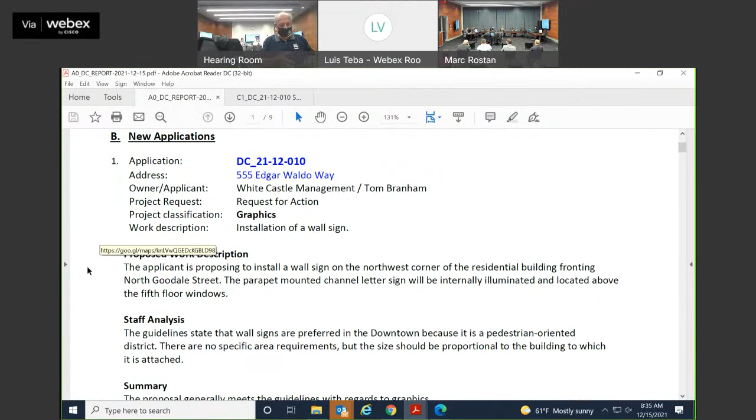Sure. So the first case is 555 Edgar Waldo Way. It is here at the White Castle Reach Development. The applicant is proposing to install a wall sign on the northwest corner of the residential building fronting on North Goodale Street. The parapet mounted channel letter sign will be internally illuminated and located above the fifth floor windows. The guidelines for graphics are that wall signs are preferred downtown because of its pedestrian oriented district. There are no specific area requirements, but the size should be proportional to the building to which it is attached. So the proposal generally meets the guidelines with regard to the graphics.

That's it. Okay, very good. Can we get the... you take over from here. Would you identify yourself, please?

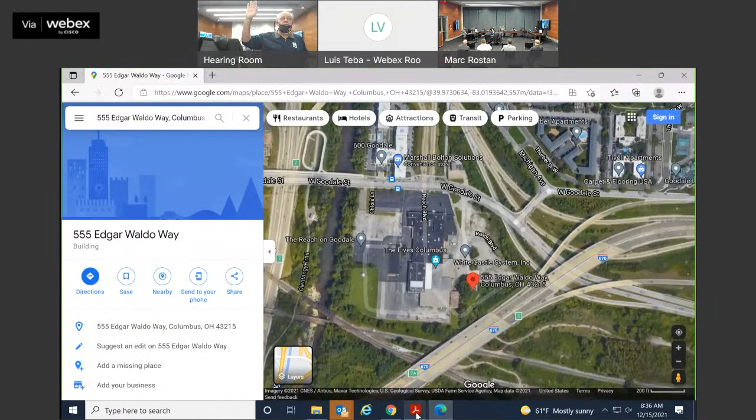Yes, I'm Bob McCollum, and I'm here representing Branham Sign Co. Could you raise your right hand, please? Do you swear and affirm the testimony you're about to give is the truth, the whole truth, and nothing but the truth? I do. Thank you very much.

Go ahead, Bob. Yeah, we're just here asking for approval of the individually mounted channel letters on the reach. It's a typical channel letter, so we've already done this type up there. They will have a white face, and the drawing on page 2 indicates the side of the building that the letters will be mounted to.

Are these the same size as the stuff you've done before? Yeah, I believe that these are 24-inch letters. Okay. And you can see a picture of how it looks on the building. Is it just the one, or were there two? There's just one set of letters.

Any thoughts on this, please? Could I have a motion to approve then, please? I'll move to approve. Okay, a second. Motion and a second. Thanks very much. Any other questions, comments? Anything from the audience? All those in favor say aye. Those opposed? Thank you very much.

Thank you so much. I made it just for fun. Every once in a while it gets easy.

Great. Next case then, please. We go to the next one. All right.

But one thing, we didn't do a motion to approve the minutes last week. I beg your pardon, I thought there was something. It seemed like there was something. Could I have a motion to approve the minutes?

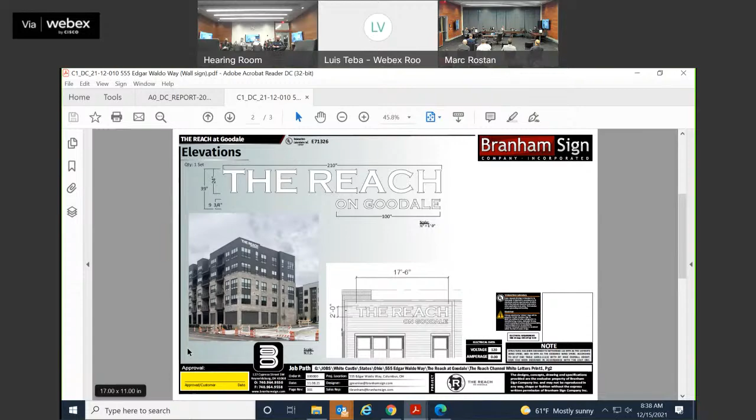Next case is 190 South High Street. Here's an aerial view of the location.

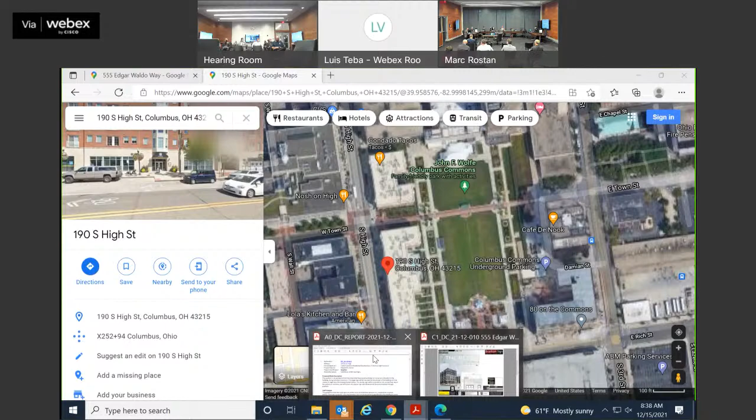This is right here to the west of Columbus Commons, this building right here. They're going to be putting 2 wall signs on the interior facing the park space there. So they're proposing 2 internally illuminated wall signs on the eastern elevation of the building facing Columbus Commons. The larger sign will be mounted to the parapet of the building and will consist of single-face illuminated channel letters. The smaller sign will be mounted on the second floor above the pedestrian archway and will consist of a plaque sign with dimensional illuminated push-through graphics.

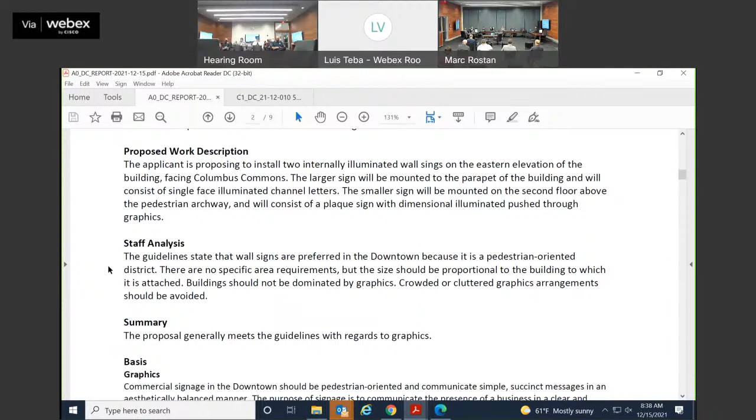Guidelines for graphics are the same, except crowded or cluttered graphic arrangement should be avoided. The proposal generally meets the guidelines with regards to graphics based off the analysis of the graphics section. Is someone here for the applicant, please?

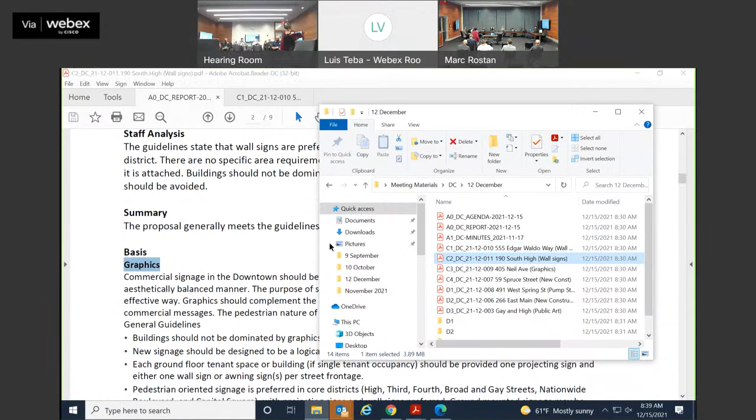Good morning. Good morning. My name is Rebecca Green. I'm with Zoning Resources, and today I'm working with Columbus Sign Company.

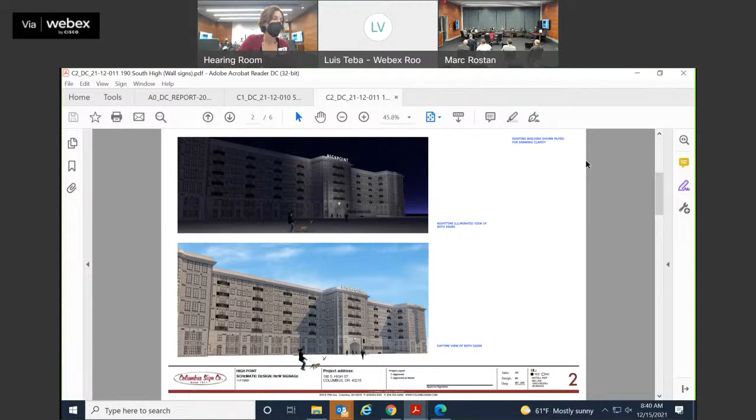The reason we put them here on the parapet is that the cornice underneath is not something we can use to stand on or have our workers on to place those below the cornice. Also there are windows underneath the cornice that would not provide an area to put this kind of signage. We want to keep the workers safe and have it above the cornice, and that is why we decided to use these kind of letters in this location.

The plaque that we are talking about is just a plaque that's over the pedestrian walkway from the Commons to High Street, and again, it's a small plaque with the illumination in the back. Happy to take any questions.

Okay, yes, I have a question. Yeah, please go ahead. Yes. Yeah, I may not have heard you well. Oh, I apologize. Mask, by the way, you're welcome to take your mask off. I think you're well separated and it just makes it easier to hear people. Oh, very good, thank you.

What is the owner's purpose of putting this sign in for the building? The purpose is to gain some additional presence from the Commons. Other businesses have done the same thing. I know Root Insurance also has signage towards the Commons, as well — that's the purpose.

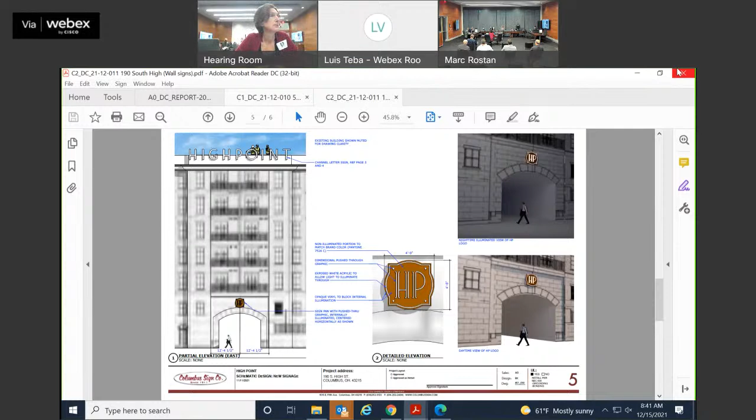What's the height on these letters, please? I believe 4 feet. 4 feet 6 inches and a half.

The spacing is to reflect the customer's logo, the High Point logo is spaced in this manner. This part of the building is massed forward, so they're spaced to match that massing that's forward on the building. And then again, the size and proportion is based on the...

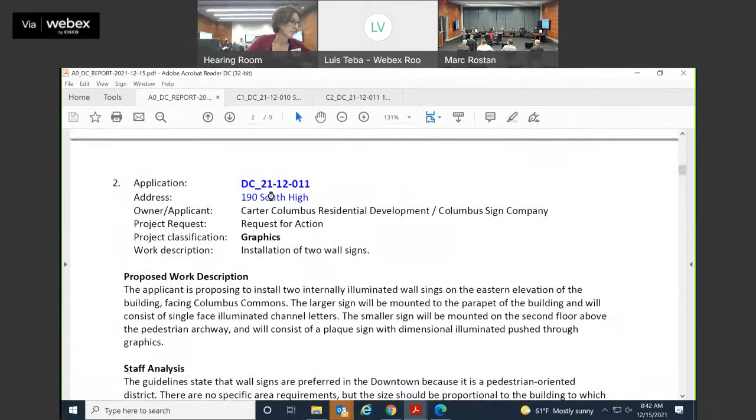What are some of the other heights of signs in that area? Do we have any sense of that? They're not massive letters, but maybe a little bit on the high side at 4 feet. I don't know, maybe that's not... Yeah, at that height, it seems like you need something that reads a little larger.

I wanted to ask you, from the back, you have the exposed metal channel in the back. Do you feel that from across the street, any buildings could see the back of that, or not? You could see the back of your sign? I would think it would be just a de minimis kind of view, not substantial.

Can you show us the picture, flip back to that, either Rebecca or Luis? No. Yeah, there we go. So about half of the letters will be up above the parapet. That's approximately two feet, as much. Of course, they're also going to be looking at air conditioning condensers and other rooftop items.

Okay, what's the pleasure of the group? Any thoughts, comments?

I like the way it interacts with the parapet. I guess one question, did you consider that, for instance, the H aligns with that very edge of the building? I wonder if it would feel better if it was centered and offset by a couple of feet in each direction.

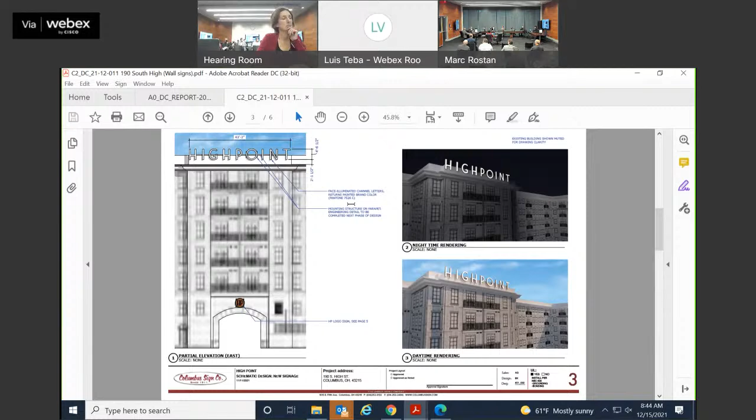I guess I feel a little tension with that H right on the edge of the building, because the T doesn't seem to do that. I don't know if that's intentional or just a mistake in the rendering, or is the intention to center it?

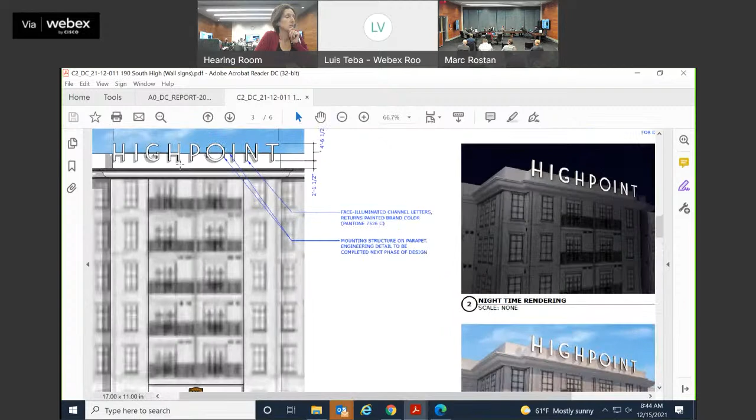The intention was to center it, and I think the reason the T looks a little in is just the nature of the letter. I agree that even though technically that's correct, maybe splitting that dimension, bringing the H in a little and letting the T hang over a bit, might look more centered.

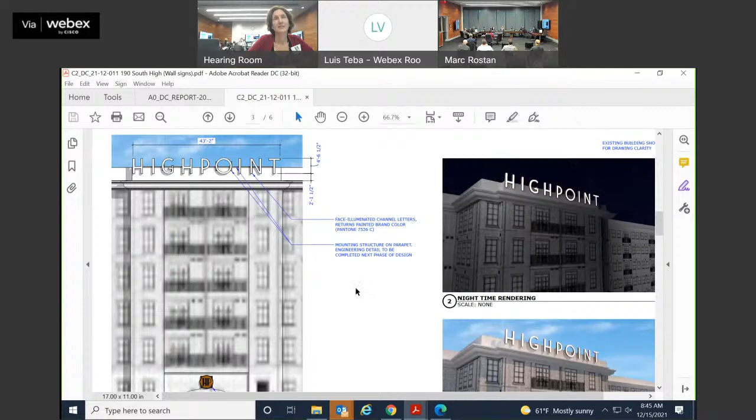Is that supposed to be two words, High Point, or one word? High Point is one word. I'm just looking between the H and the P there - it looks almost... when you play with letters and space them exactly, sometimes they don't read correctly.

Our eyes do things to it, yeah, like that's right, the spacing. For example, the O looks like it needs more space than the I does, which of course it does.

I don't know the exact picture for that, I'm sure the fabricator... but I understand your concern, that you would want that to be better handled.

One thing we do get with elevations is, if you're going to be looking at it, you're probably going to be standing on the ground, which can make a difference, and of course the cornice is going to be a factor too.

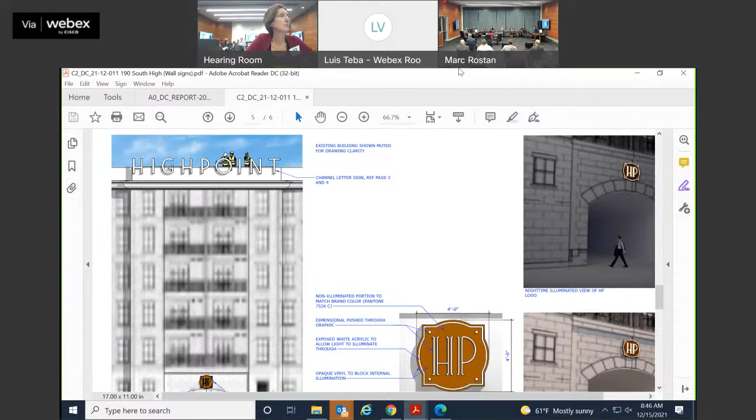I think the commissioner asked about the buildings from the other side of High Street, looking at the back of it - so you have the Lazarus building and all the stuff on the west side of High Street.

I'm just saying, maybe sometime the back could be finished, if you felt that was an issue, so that it doesn't look unfinished from other buildings on the other side. But I really don't know if that would be such a minimal issue or something to consider.

What would finishing mean? Painting it, for example? What is it going to be, what is the material on it? It looks like it's just... painting it dark or maybe putting something else.

Can we see the picture of the back again, can you flip over to that? I think it's mostly some bracketing, but again, it's just aluminum bracketing.

What's the color of the back of the letters then? It's just black. I wonder, here it shows like it just looks like galvanized frame kind of stuff - like you could use metal studs or something.

I wonder if it could just be painted to match the back of the letters. Does that accomplish maybe what's needed? That would kind of clean it up, maybe. So painting the bracketing - is that what you're concerned about? Yeah, the bracketing would then match the back of the letters.

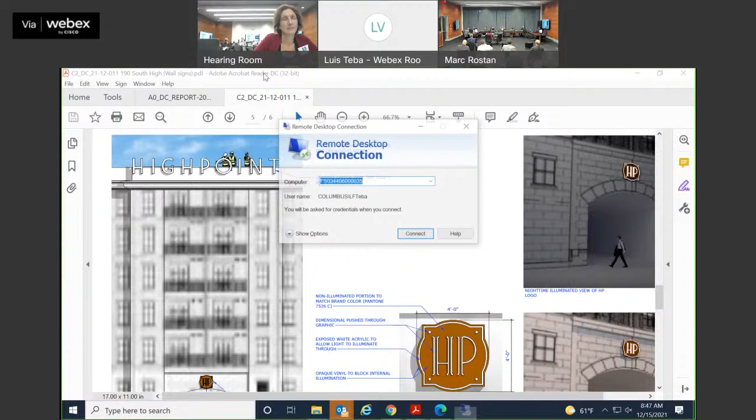Here's what I think we're getting at: if you have a curved line like in the drawing, there's a piece of the bracket sticking up above it. If you're standing off to the side and can see something behind it, that's not what we're talking about, right? No, we're talking about where it literally sticks out, so if you were standing straight on in front of it, you'd see it sticking out behind the letter itself. Does that make sense? It does. I think we're probably willing to approve it on that basis. If that doesn't work, you can come back and we'll talk about it. I'm guessing they'll say that's fine, it's not very difficult.

Thank you. Okay, good. Any other questions, anything from the audience? And that works for you today then? Yes, it does, thank you. Any other questions or comments from the commission? Oh, okay, go ahead please.

Question: the small sign over the arch, is that all internally illuminated, or just the text within it, the initials? Just the text within it, and I believe it's got some spill also, because it does stick out, so it's got some of that. It's a dimensional plaque, so there is some. Does that mean what appears to be lit would be lit? Is that the idea? That's correct.

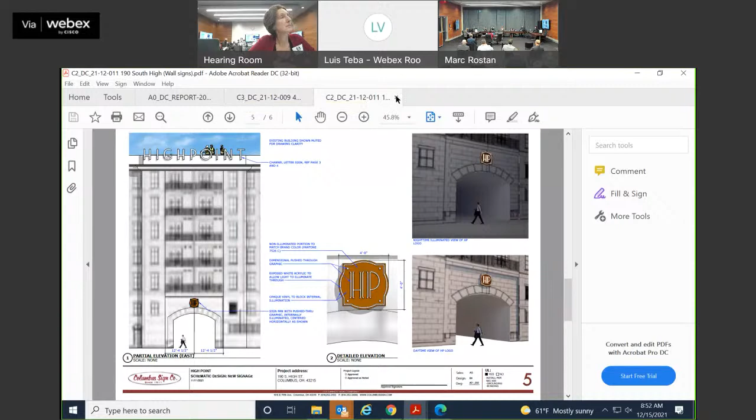Anybody have a problem with that? Because we're approving that as well. Okay, so let's vote. All those in favor say aye. Aye. Those opposed? Thank you very much.

Okay, next case is 405 Neil Avenue.

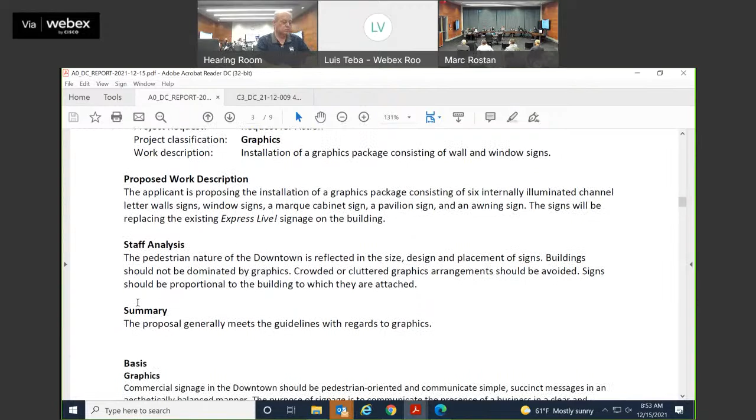Currently Express Live, just north of Huntington Park. The applicant is proposing installation of a graphics package consisting of six internally illuminated channel letter wall signs, window signs, a marquee cabinet sign, a pavilion sign, and an awning sign. The signs will replace the existing Express Live signage on the building, so wherever there's Express Live signage, they're changing it to Kemba Live. The staff analysis: the graphics from the previous two cases are the same, and the proposal generally meets the guidelines.

Okay, and you're already sworn in, Bob, so go ahead. Yeah, we're proposing... Bob McCollum, that's right.

Same guy. First, I'm gonna say I'm playing the lottery tonight, put your mask back on. I'm playing lottery tonight because I've been doing this for 37 years and I never had the top three on the agenda, so I apologize. How's it feel, all right? That's great, I'm good.

So we're proposing a change out. We tried to keep the square footages of the Kemba Live signs as close to the Express signs that were there, and we're simply replacing every sign that says Express with Kemba Live. So no additional signs.

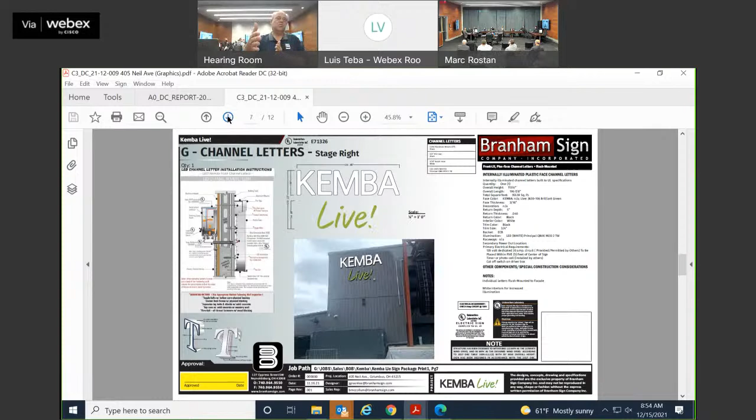Just that one there, huh? Well, you've got two, there's several signs. There's signs interior, there's one sign that faces Neil that's most visible to the public, and if you go around the corner where staff park there's one there, and most of the rest are inside the venue. Are all the letters the same height? They're various heights, because again, we tried to keep what was there.

They range anywhere from 42 inches to 48 inches. They're slightly larger though, because of the layout, but we tried to keep it as close as we could.

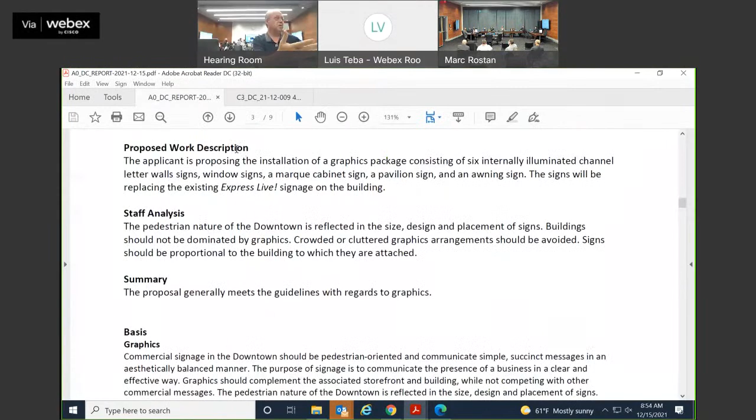So are the graphics on the windows new? They're replacing old ones, the new ones are green for Kemba's marketing, but there's already graphics out there, so we'll be taking those off.

I had a question about the vinyl graphic, do you just have that on one set of windows or two? Is it just one bank of windows? There's a bank that faces Neil, and then inside the venue where all the party goes on, there's a set of windows there. This one, maybe - there was one where it looked like on one of the upper panels, there was also the logo of Kemba.

There's a slide for that? Talking about the window signs? Yes, the window sign. And I'm just wondering, the one on the top, is that the one facing Neil, or is that? No, that faces into the venue.

If you've ever been there, there's like the Great Slice or something like that, where the food court is. It's right across from it. It's right here, it's internal.

This is a lot more signs than we normally want on a project. This is the arena district, and when we set up signage guidelines, this is what we're looking for - a lot of action. We didn't have to say chaos in the guidelines, but we were looking for that.

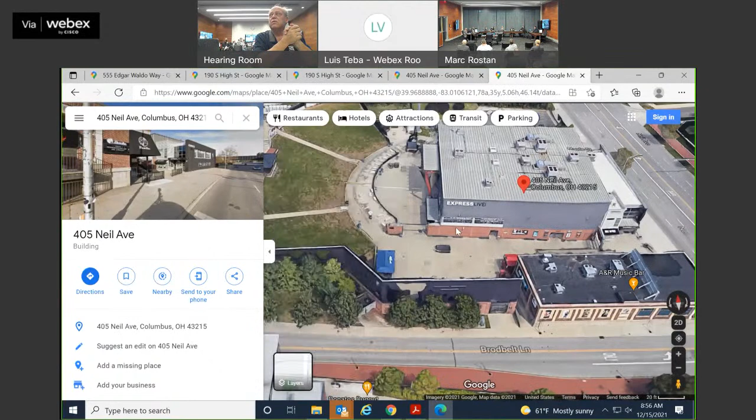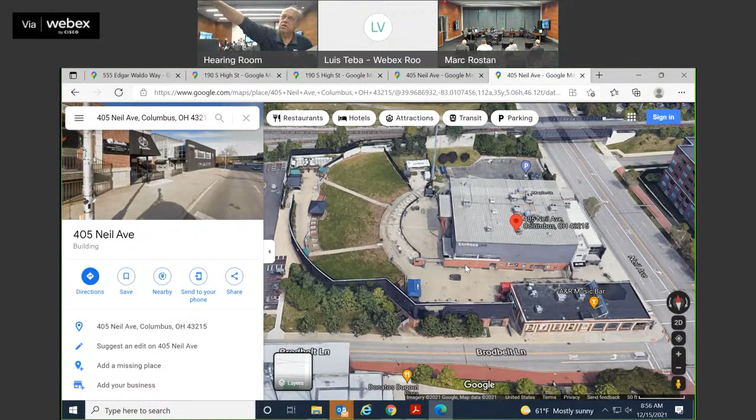Placement, what we're sorting - a lot of these are kind of internal anyway, and there's three of them that are internal, and three that are external. Including, if you look at where Arch is there in the grass, there's a parking lot behind that. There's actually a sign that faces that parking lot at the entrance. Is it on the fence? No, it's on the wall.

And then basically with respect to Neil Avenue, which frankly I think is our number one concern here - you've seen that one then. Any thoughts, problems on that one? That's Neil Avenue - I think it's pretty clean, maybe better, right? The one on Neil Avenue, I think the vinyl is nice because it's simple, and the one that is a little busier is fine if you say it's internal.

Okay, what's the pleasure of the group? Move to approve. Second. There's a motion and a second. Who made the motion? Okay, thank you, Tony. There's a motion on the floor - any other questions, comments for the applicant, for anybody, anything from the audience?

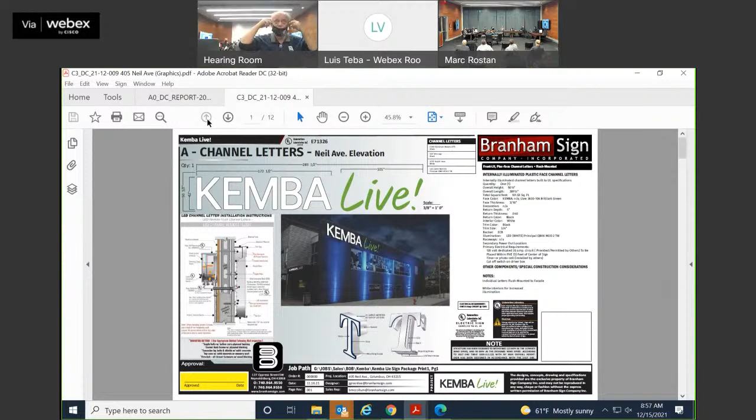All those in favor say aye. Aye. Those opposed? Thank you very much. I'm leaving now, sir. Oh, okay, have a great day and a great holiday. Thank you, everybody else.

Okay, so the next case is 59 Spruce Street, North Market Tower. They're proposed to construct a 31-story mixed-use tower in the North Market parking lot. None of the details have changed: 350-space parking garage, 700,000 square feet, 11,000 square foot expansion in the North Market, 20% reserved for workforce housing.

So the applicant is seeking approval for the demolition, the new construction, and landscaping, but will return at a later date with lighting and graphic details. To clarify, any kind of building lighting above the first floor will come back, but they are seeking approval of the landscaping plans, the streetscape plans on their parcel, and the lighting plans on the building and first floor. They have some images of sconce lighting and stuff that's the issue.

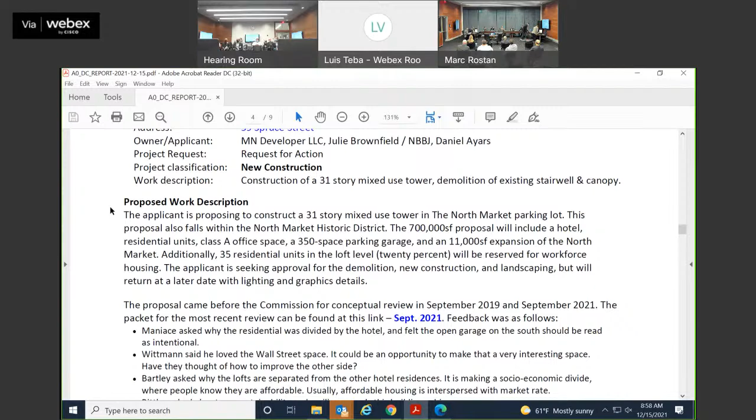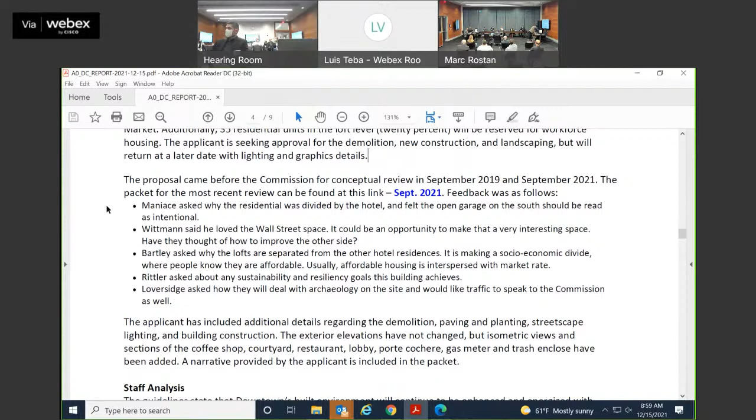They came before the commission for conceptual review in September 2019 and 2021. At the September 2021 meeting, Maniace asked why the residential was divided by the hotel, and that the open garage to the south should read as intentional. Wittmann said he loved the Wall Street space and had they thought about how to improve the other side. Bartley asked why the lofts were separated from the other hotel residences, saying it's making a socioeconomic divide - usually affordable housing is interspersed. Rittler asked about the sustainability, and Loversidge asked how they will deal with the archaeology on the site, and they would like traffic to speak to the commission as well.

So the applicant has included additional details regarding the demolition, paving, and planting, streetscape lighting, and building construction. The exterior elevations have not changed, but isometric views and sections of the coffee shop, courtyard, restaurant lobby, porte cochere, gas meter, and trash enclosure have been added.

The guidelines state that the built environment will continue to be enhanced and energized with new buildings and improvements to the public realm. Building height, scale, and design quality relate to the city's development goals for a broader downtown, while also addressing the context and compatibility of a proposed building with its more immediate surroundings. Downtown is home to the region's most intense development, so larger scale buildings are appropriate, particularly at the core. The commission encourages maximizing the investment potential of a given site, and building materials should be of high quality and durability. So in summary, the proposal generally meets the guidelines as stated above.

Staff notes that the proposed tower was conditionally approved by the Historic Resources Commission at their November meeting with the following conditions: that the proposed footprint, height, massing, materials, and skin of the building are approved, conditioned on the submittal of a comprehensive color-coded drawings package, notating colors and materials, including but not limited to exterior lighting, landscaping, and awnings prior to the issuance of a certificate of appropriateness.

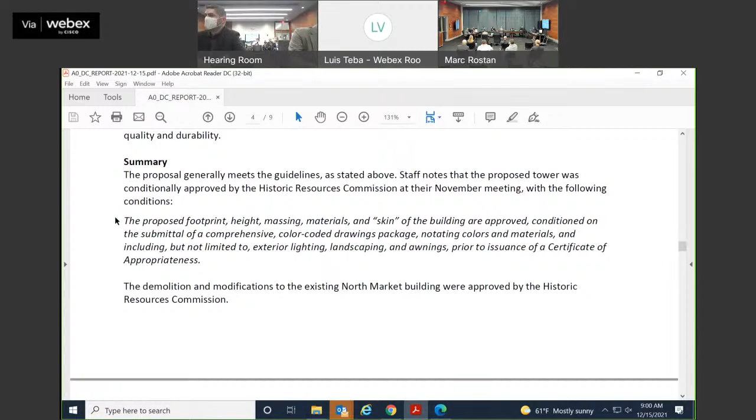The demolition and modifications to the existing North Market building were approved by the Historic Resources Commission, conditionally, so they will still return to HRC for final approval. I spoke to a staff member of the planning division of the Historic Resources Commission, and she indicated that the materials submitted for this meeting meet all of HRC's conditions. They feel it meets those requirements, and she's hoping to give it staff approval at the next business meeting. So what's been provided here is what they'll show HRC, with no changes.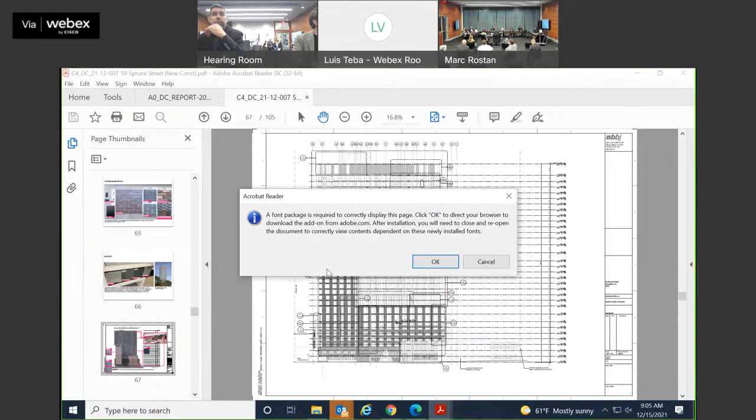For landscape, we've added planting plans. We have the paving plan and lighting plan for site level, as Luis or staff had mentioned. So we have those details in here. What's coming up now on the screen are the new pages that we've submitted to HRC. Hopefully this PDF is rather large. Colored elevations with the material callouts, along with the black and white sheets that call out the more detailed information and specifications for each of the materials. That was one of the asks that they had, and so we've continued to do that.

It really depends, I think, based on the comments from Downtown Commission, on what you had before. We have increased the amount of detail in the package, everything down to the window louvers and exhaust vents for the residents, to details around how the brick and materials at grade would be.

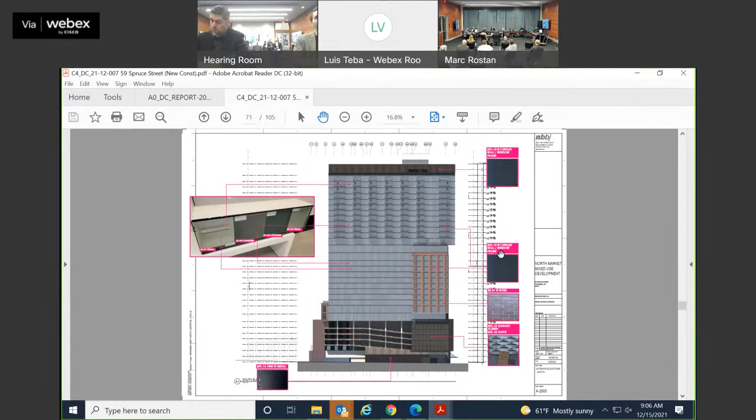The meat of the conversation last time with the HRC was really understanding and ensuring the quality of the detailing and materials, and that what they were seeing, particularly in the podium and pedestrian realm renderings, was in fact what they were going to get. So we spent a good bit of time ensuring things like window depth at the bottom 25 feet wasn't fudged - they were actually getting depth indicative of a heavy masonry building with that look and feel. Also ensuring the quality of the glazing systems, for instance at the hotel entry, where it's a legitimate steel storefront that has the look and feel of an old industrial building fitting the character of the neighborhood. I want to reiterate that was the heavy lift - ensuring everybody felt good with what was in the renderings, and that it was actually showing up in the drawings, so they could have confidence in that.

I see a graphic in those drawings - is that on the south side of the building, the south wall of the park? It is the west wall over the top of the existing North Market. It is undetermined at this point what it will be, but it will come back for graphics approval. So the idea is that would be a location for a graphic. You're correct, and you would come back for approval. Is that intended to be art, not an ad? Yes, it's art. So it would be something of a permanent nature - a determined design as a baseline until that pushes forward.

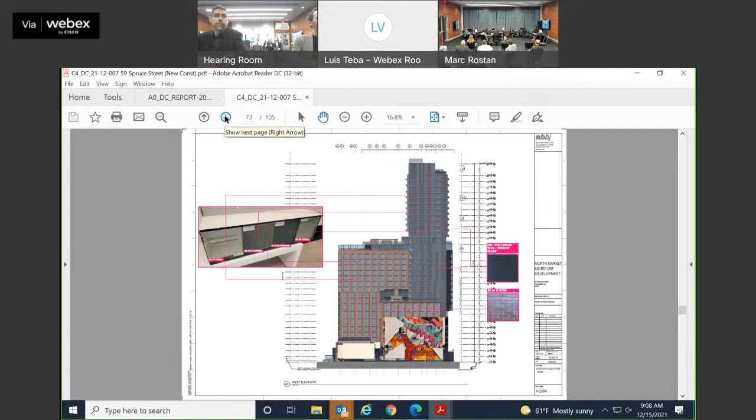Basic CMU, just the material CMU. You know, I am having a horrible time hearing you - could you guys maybe switch that, it's a problem in the middle somewhere. Oh, perfect, thank you.

The baseline of the wall as it stands today is just a big CMU, which basically matches the east side of the North Market, side of the current parking side. Unpainted then? So would it be concrete color? Currently, it's a natural gray.

Look at the site plan, please.

Oh, you have a clip there, so. Oh, good about that. No, the page is back right after the renderings, it's all the site and landscape. It's a little lag.

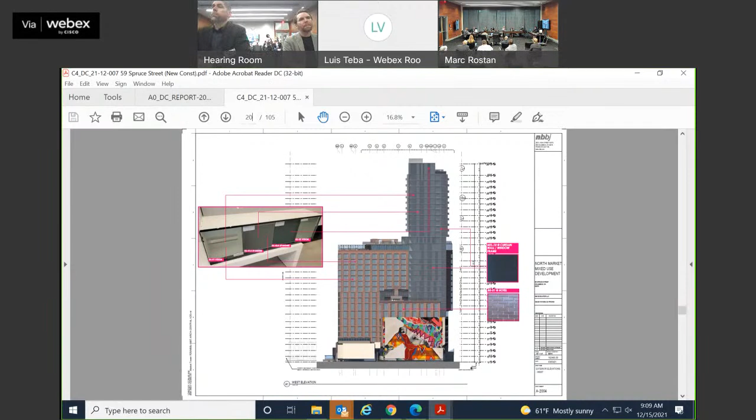And tell me again about the glazing on this. Do you have different kinds of glazing in this then? Because you talked about spandrel glass. Yeah, so we have multiple types, I want to be clear with your question. Are you asking specifically about the glazing or more the system in general? No, about the glazing itself.

So for the glazing itself, there is no spandrel until about the 21st floor on the building. Everything within the brick mass and then the podium level is all transparent glazing. The first 25 feet, which is basically the pedestrian realm, all the major entries, the retail, all of that is a high VLT, high visibility, transparent glazing to make sure we've got real visibility into those spaces.

So does that read as clear glass, or is it tinted? Clear as you can get, meeting today's performance standards, with some coloration on it. Basically there are 4 glass types, 2 spandrels and two other glazing, one for higher performance up on the residential portion and on the hotel.

The spandrel glass allows us in certain opaque areas on the glass facade to do 2 different colors, to provide a bit more than just a flat face to it. You'll see in the elevations 2 slightly different colors. It really becomes the wall material. The point of the 2 colors is really, when it wraps a core, for instance, we've got 24 to 25 feet of unbroken spandrel that isn't just flat, so the building feels like it's kind of living and breathing, like the vision zones adjacent to it.

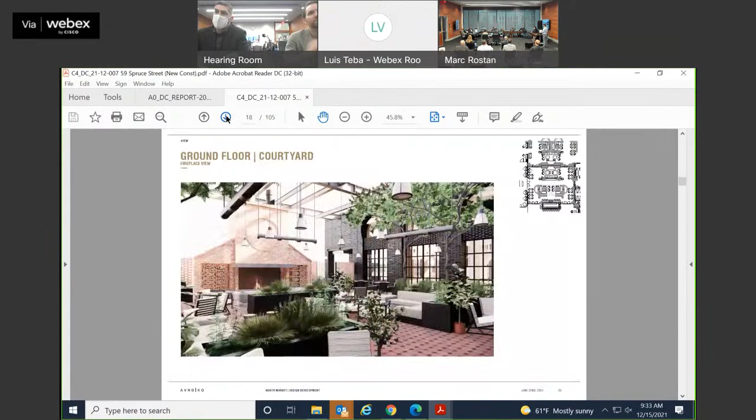So if we do an approval today, is it okay for you folks to come back when you've got the final plans? Right, the city can do that, and represent the streetscape as we've done on other projects downtown. But who's building this, is it these folks? So that will be a City of Columbus project. Okay, so you guys can come back. Correct. Does that work for everybody? Are we all set on that? Okay, what else do we need to talk through on this? Anything, folks?

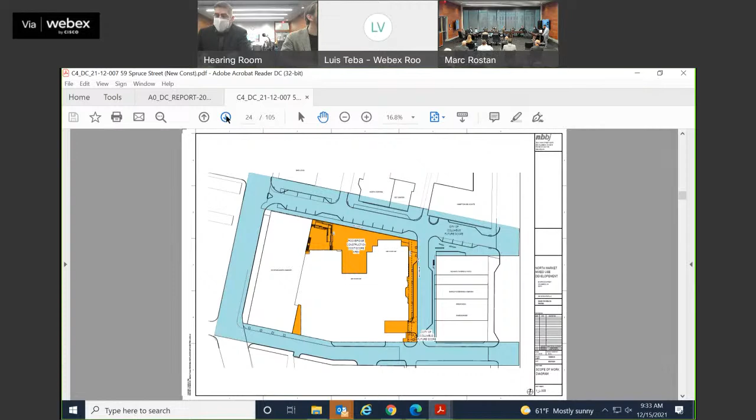Go ahead, Janet. Two quick things. From the entry of the hotel, if somebody's standing there waiting for an Uber, what exactly are they going to see? Like we talked about on Wall Street, some businesses have an awning and entry, and others are essentially the back, and maybe there's not much to see. I'm wondering from that entry, what you see across the street, on the west side of the buildings that run along High Street. We don't own those buildings, so hopefully those folks clean it up over time, and it is what it is, I guess.

I think that's going to be part of the character. With the cleanup we did, the renderings at the very end of the package show a before and after, once the new paving comes in and the power lines go away, that alone cleans it up, revealing the old historic facades and each storefront. The street and sidewalk on the other side get cleaned up, and the dumpsters too. Several of those buildings over the last couple of years have already improved the backside, so they beat us to the punch a little, and there's every hope others will follow.

Okay, other questions then? Anything else we want to chat about? Big project, what's everybody think? Any thoughts? What's the consensus here? Somebody want to make a motion?

I make a motion to approve. Okay, there's a motion to approve, and a second from Mike Lusk. I don't want to cut off questions or conversations. Anything else? Any other comments, questions? Did we miss anything, Tim? Is there anything from the audience? I'm just checking with the commission first. Anybody in the audience have anything? Okay, before we vote, go ahead.

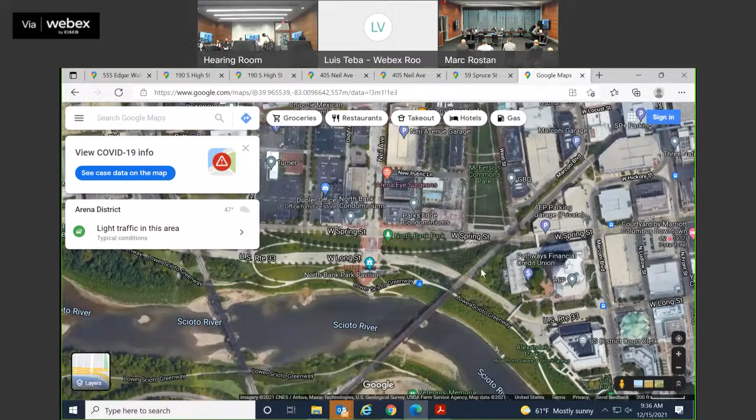So the next case is near the North Bank Park, regarding two pump stations. We discussed this about a year ago. At one point they were proposing to build two pump stations inside North Bank Park. They've since modified the proposal to put one pump station to the west of the AEP building, and another to the west of the railroad line. Originally they planned a driveway out to the North Bank park structure, but they've been working with us since then.

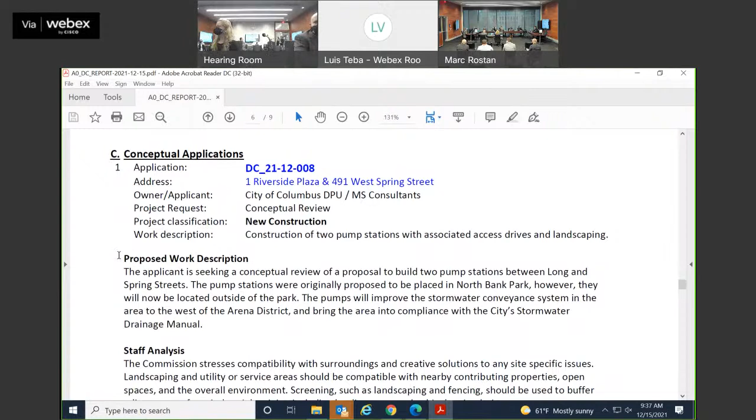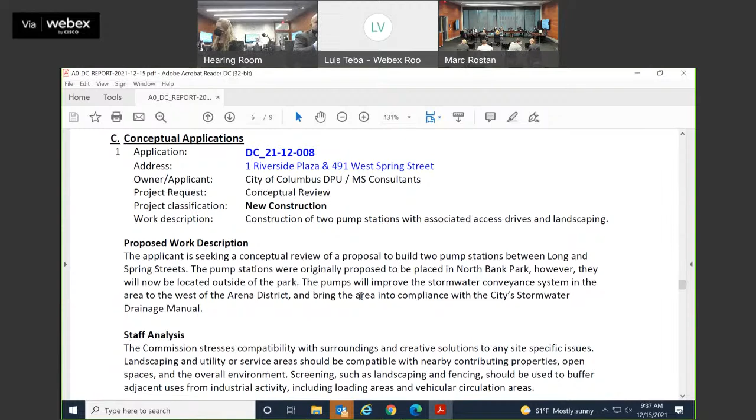So the two pump stations will be between Long and Spring. The pumps will improve the stormwater conveyance system in the area to the west of the Arena District and bring the area into compliance with the city's stormwater drainage manual.

So the commission stresses compatibility with surroundings and creative solutions to site-specific issues. Landscaping and utility service areas should be compatible with nearby contributing properties, open space, and the overall environment. Screening such as landscaping and fencing should be used to buffer adjacent uses from industrial activity, including loading areas and vehicular circulation areas, which this project does include.

So the location of the pumps is an improvement over their previously planned locations. Additional information in the way of landscaping, lighting, screening, and site design will help determine whether they meet the guidelines. It's conceptual at this point, so we just don't have enough to really sink our teeth into. I did make a site visit.

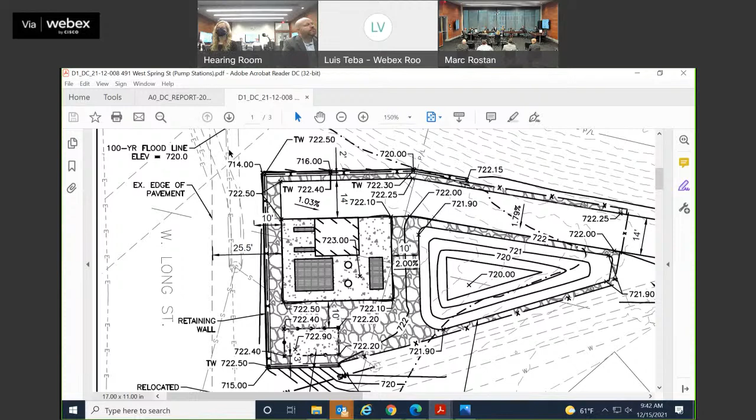What are you proposing for the fencing around it then? It looks like a metal fence. Yeah, it's the fencing we can do - any kind of fencing, it's your preference. And it looks like the building itself, you're trying to have it match the building at the end of Neal Avenue. We set those up to try and match the architecture within North Bank Park. Yeah, that was the idea behind that.

Is this preliminary? It is, yes. This is conceptual, so we're talking - we didn't want to go too far on the sites until... I'll tell you what, thank you very much, we appreciate that. So where the retaining wall is, inside the fence, is that something that is predominantly going to be paved?

Or are you going to keep that more of soil so that there can be plantings, or a combination of both? Combination of both, but yeah, there will be plantings and area for landscaping and screening that we can incorporate into it.

That wall switches back, 7 feet. So you're really not gonna see whatever the surface area is. Yeah, not from the street level. Not from street level, no.

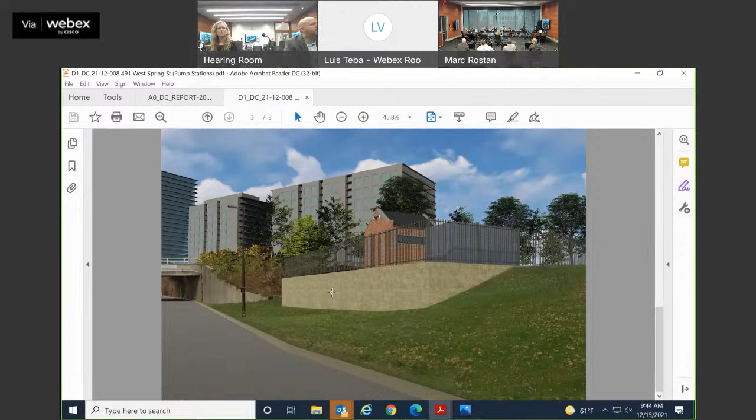This is the east pump station, next to AEP. This one will have an access drive, you can see Spring. Yeah, where is that? Oh, it's not showing on the drawing. Oh, it's right here. Oh, I see it. Okay, let me rotate this so you can see it. I've got my directions on this thing.

East is to the right, west is to the top, and here's Long Street - here we've switched it. This is how it'll look. Here's the AEP building. There'll be a long drive to this one. And then the other site won't - the other site will just park on the street.

Correct. Yeah, we've been through several iterations of these site plans. We started out with meetings with sewer maintenance to see what they wanted on the site for access and maintenance, so they could maintain them. The sites just got too big and we couldn't fit them on these other parcels, the one next to AEP and the one on the other side of the tracks. So we shifted the conversation from what would you guys want to what do you guys need to be able to access these for maintenance.

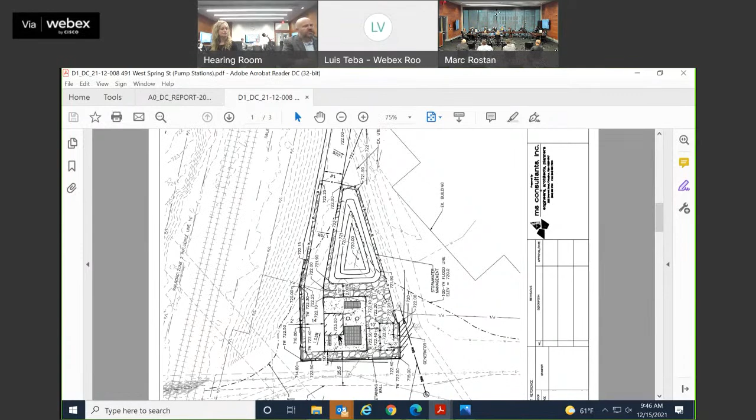And that's where we're able to shrink the size of the sites and get them on these different parcels, and kind of tighten them up. One thing we had to do, particularly with the west station, is slide it closer to Spring Street so they wouldn't need access for a Vactor truck to clean out the wet well and trash rack. The east pump station, we couldn't get it close enough to Long Street because the Franklin Main 60-inch sanitary sewer is right there, so we had to back away from that - that's why we have to have a drive.

Does that also have a retaining wall around it? That one will, yes. Same height, roughly 7-ish? Roughly, yeah, it varies on that site because it's on the slope.

I'm almost wondering if the most important thing here, in a way, is not the building - the building is unconnected in a way from the park to me. But what you're really going to see, and what can really make a statement, is this retaining wall. I'd much rather see that be very well done and stick the money into that kind of thing - even if the pump station itself turned into a black box with a flat roof, as opposed to trying to be brick or whatever. I don't think we have to make an architectural statement out of that, but I do think this retaining wall is going to be something very visual.

In both of these cases, maybe there could be some planting at the base of it. I really congratulate you for a nice fence instead of a galvanized chain link fence kind of thing. So from my standpoint, I think this is a great improvement. Anybody else have any thoughts? You're the landscape architect on your team. Because it's still part of one of our premier parks, right? It's not a ball field or something.

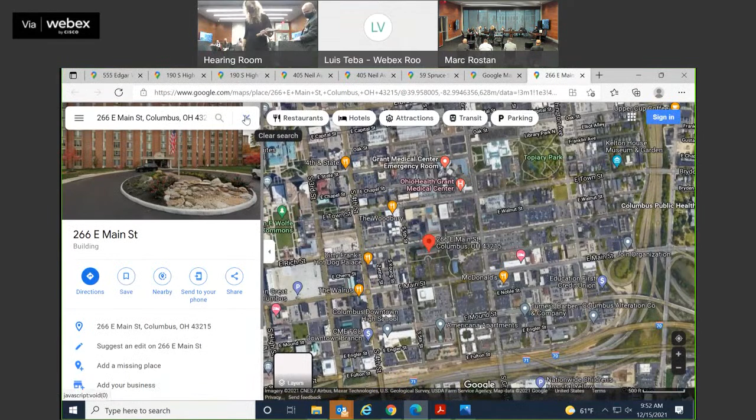Yeah. Okay, next case is at 266 East Main Street, Jaycee Arms Apartment, this large property between Main and Rich. The applicant is seeking conceptual review of a proposal to redevelop a major portion of a city block. In anticipation of this development, the single parcel block underwent two staff-approved lot splits in 2020. The plan for the southern lot calls for two 5-story mixed-use structures with 120 workforce housing units and ground floor commercial fronting on East Main Street. On the western lot, a 5-story mixed-use building will contain market rate units and a culinary educational facility. The Jaycee Arms building will not be modified and its current drive will remain.

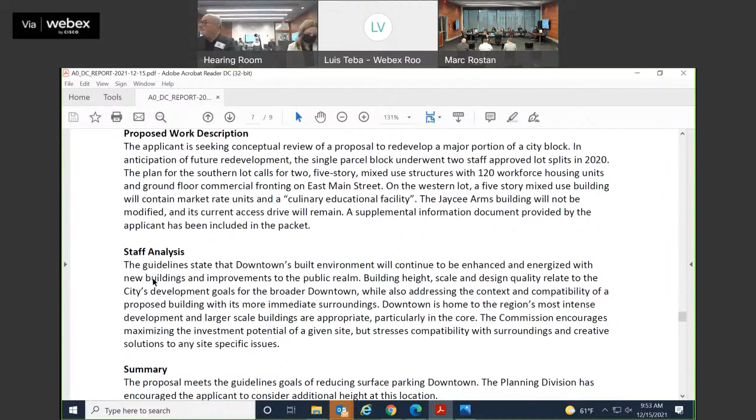To the south, a supplemental information document was included. Our analysis of the guidelines has already been mentioned at this meeting, so I'll not go over them again. In summary, the proposal meets the guidelines' goals of reducing surface parking downtown. The planning division has encouraged the applicant to consider additional height at this location. Okay, very good.

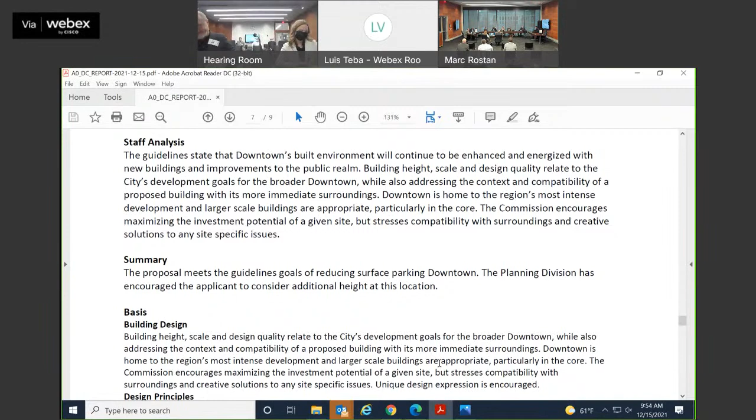Well, I think that Luis pretty much summarized everything. If you want me to go ahead - absolutely, you're on it. I think what Luis said and what the application was all about pretty much identifies what the intent here is. Obviously this is a conceptual review, so we want to discuss really the concept, first of all the intended uses, and obviously at this point, design.

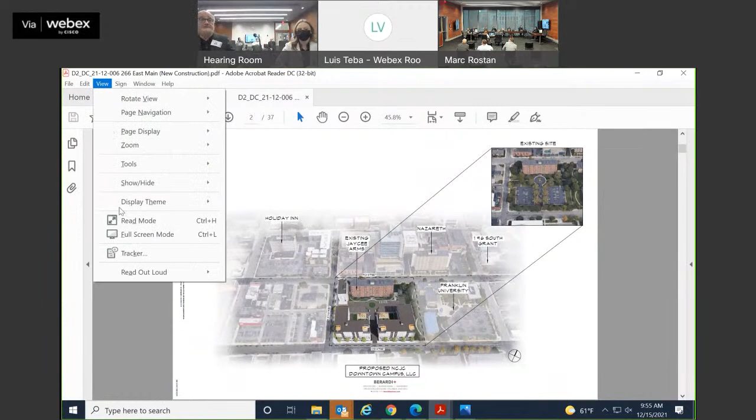As you can see from the original site, as Luis mentioned, parcels were separated from Jaycee Arms. Jaycee Arms, by the way, is the lead that formed NCJC Development Corporation to develop this property. So there are several parcels that have been identified in one of the exhibits, which show the parcels to the south, roughly 1.7 acres, the two parcels where the 5-story buildings sit. And then there's another portion of the site that was separated out as a separate legal entity immediately adjacent to the west of the NCJC, or the Jaycee Arms building. The intent is to really populate this entire city block rather than just one building at a time.

The project will be seeking not historic tax credits, but housing tax credits in February. The likelihood is probably that it'll be developed in phases, but we want approval for the entire development, or at some point down the road for the entire thing, including the property to the north. It's also entirely possible that, given funding cycles for housing tax credits, it may be developed at some point as a single development for the 120 units facing Main Street. So Main Street will be activated with workforce housing, primarily workforce housing, based on that definition from Ohio Housing Finance Agency, which is a little different than your last case, which is higher end workforce housing. This is probably workforce housing that's going to strike a chord somewhere between 50% to 80% AMI as far as income limits are prescribed.

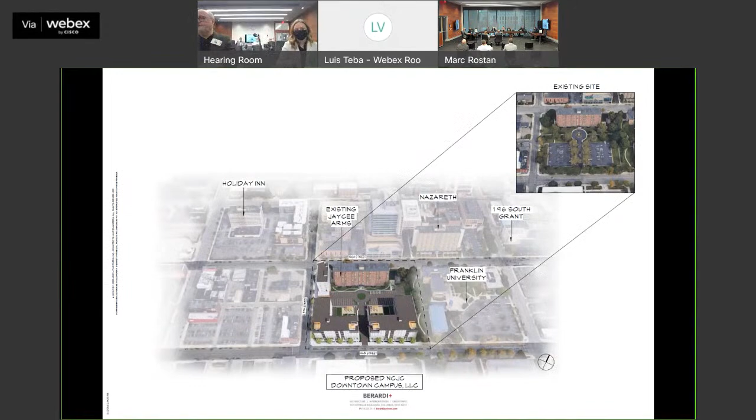So that would be floors 2 and 3. Above that would be 3 stories at this point of market rate housing, coming down to somewhere between 18 and 20 dwelling units, largely limited to 1 and 2 bedroom units, strictly market rate housing.

Moving back, let's hold that last slide for a second. This one shows how these parcels have been realigned and redefined. The green is the portion tied with city schools and Columbus State. The blue at the bottom is more of the workforce housing, the 5-story buildings.

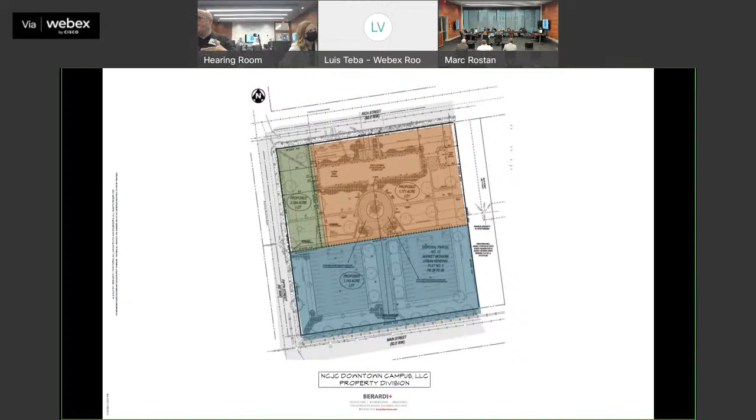Are those totally apartment units? Well, not totally. The culinary function is in the upper left-hand corner. At the lower end, activating Main Street was one of the goals, meaning we're including a certain square footage of commercial space, whether retail or other commercial, possibly small offices.

Between the two buildings there's fairly substantial space, but lobbies will be located there as entrance points. The key element here is a view directly north to Jaycee Arms. That driveway exists right now and we're retaining it. The entire site of NCJC, or Jaycee Arms, will be redeveloped, including the parking that exists in the back.

There's also an access point from South Fifth, so we'll maintain both that access point and the south point going north to Main Street. That last plan showed the actual parking rearrangement. There's more parking right now than necessary for this entire property, especially given the elderly population at Jaycee Arms, so we're reducing it to somewhere around 75 or 80 parking spaces at the end of the day.

I'm a little nervous about being specific about the number of parking spaces until we have a final engineering plan, but somewhere in that order will be provided for Jaycee Arms. The parking to the south will be provided internal to the building, since those two buildings are podium buildings, providing approximately 48 spaces, again only approximate until final design. Those will be secure internal spaces for the residential buildings proposed.

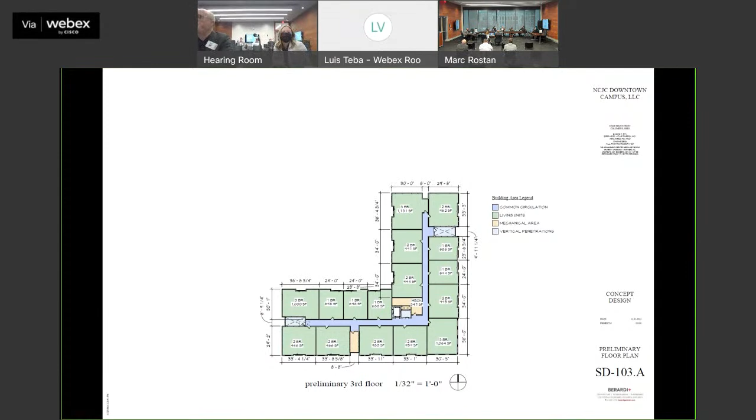I'm wondering, when I looked at that, if you want to do that. They're symmetrical, and if you're trying to create some kind of streetscape, I wonder if you want a little modulation and have it broken up, and maybe even a roof line that comes and goes a little bit, because right now it's just two shapes in this piece here.

The whole idea, Steve, is to really populate and activate Main Street. But at the same time, I think we will have some of that modulation of the building as it goes back and forth, and that might start to show up with some of the elevation. The other thing that happens is we are stair-stepping the buildings down at the edges, so the edges will really be 4 stories rather than 5, as you can see here.

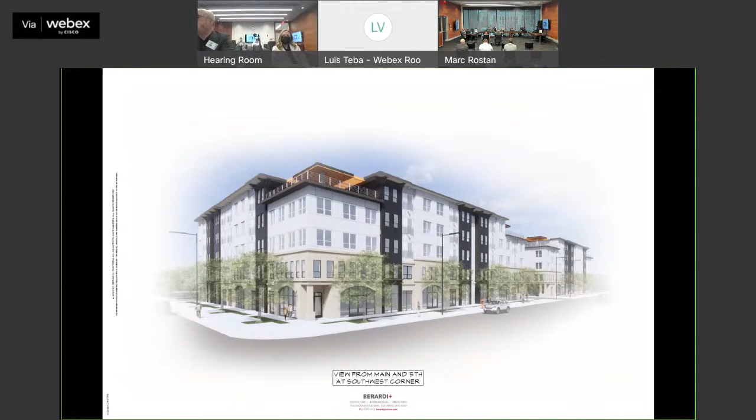So yeah, I'm just wondering if it might be more interesting if it's not two mirror images of each other. That's an aesthetic thing, so I don't know. Liking that, the driveway, original building. Yeah.

You can imagine we've tried the two L's like this. We tried it. No, I don't misunderstand you. I think the L-shaped piece, that's fine. I don't have a problem with that.

But we'll modulate the building. The building will move a little bit, so the elevation won't be a stark, straight elevation. I think, Steve, that's maybe part of what you're thinking about. But also what we're doing is stair-stepping the building down at each of the corners. You see it at the corners facing Main Street, but what you don't see is it will happen at the back of the building as well, so all the corners will be activated as public spaces for the residents.

How wide is the driveway that goes back there then, just out of curiosity? And is there anything on either side of it, do you have sidewalks along it? Yeah, there will be sidewalks. In other words, does it read as a kind of thoroughfare, or just like a driveway to go to the back? No, actually there's some parallel parking off of it, so it's pretty deep, about 45 to 50 feet. The buildings are separated about that much, so that's a pretty good size.

I had a thought about that, and it looks like when you were explaining it earlier that you really need to keep that as vehicular access. But I'm wondering, as you develop the project, if there's any way, maybe with the paving or other detailing, to make that seem like a plaza or something with more of a pedestrian feel, something more integrated into the streetscape. I don't know if there's enough room, but if your intention is to have cars coming through, maybe there are bollards and an area for people to walk, because I think it's an opportunity to draw people off of the street and back into the space.

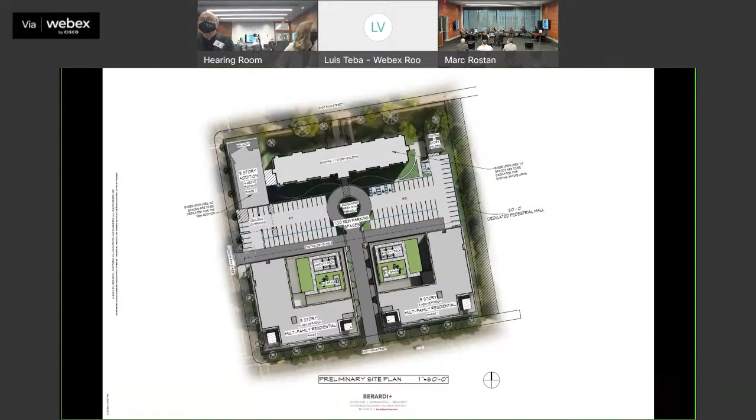I think the west building, that corner that you created with the angled window wall, is very successful and works really well. It's very creative, so I really like that a lot. And the building that has the culinary school.

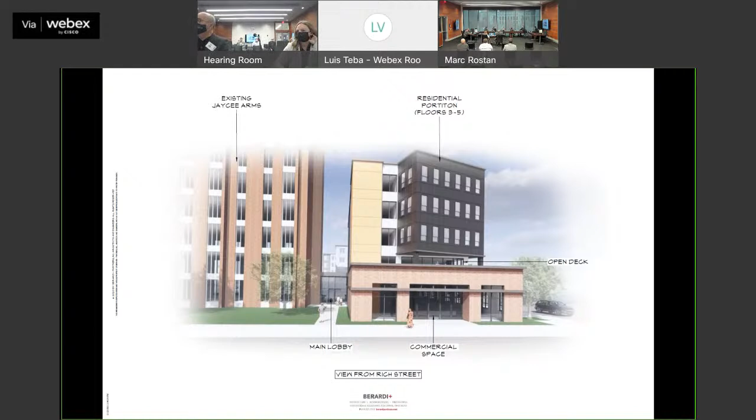You talked in the very beginning about whether there is a commitment from Columbus State and Columbus City Schools, or just an interest. There is interest, there have been conversations. I don't think there's a firm, formal commitment. I understand why, being close to the downtown high school as well as Mitchell Hall down the street.

Let's say for some reason that does not happen, what would you do with that space? Have you thought about other commitments for the future? There are possibilities for the commercial spaces there, but I think the conversations that have occurred so far could go quite a long way to making this happen.

Just as a point of interest, while the residential buildings facing Main Street are subject to tax credit allocations, there is no tax credit allocation for that building. So that building would likely move quickly, whereas we all know the process for tax credit allocations could be a little lengthy.

Marc, I think it's a great idea. I was just asking, was there a true commitment by both of us? There really isn't a firm formal, but in intent there have been ongoing conversations for quite a long time, so it's really with hope. But to answer your question, if that were to fail, there would be other opportunities to bring the commercial facilities into the building. Thank you.

It's a great use of space, a big open space that's been there for a long time. Nice store.

I think, again, the idea goes back to the whole initial comment that even Luis made, by repopulating this large portion of real estate downtown, basically completing the block. I know we've talked about a variety of things here, but it really stands off of High Street by half a dozen blocks, so I think the massing is appropriate for the site as we're proposing it. And it certainly becomes an affordable building to construct at that point.

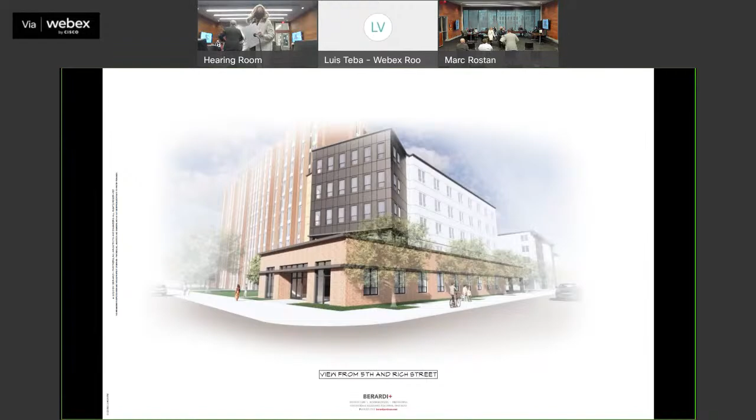What else do we have, Luis? Public art. Oh, yeah.

We're going to be reviewing conceptually, but keep in mind for this proposal, the Downtown Commission will be providing a recommendation to the Columbus Art Commission for art in public places. We'll also be in charge of issuing the COA for how it is attached to the building, but there will be modifications in it.